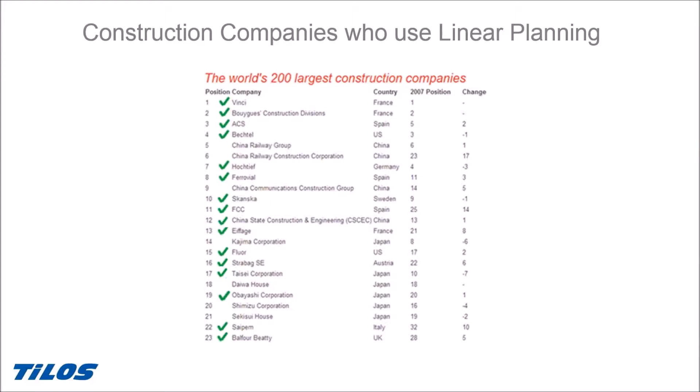Our customer list has more than 2000 entries, and I'm very proud to inform you that Tilos has been implemented in the top 25 construction companies - more than 22 of the top 25 are users of Tilos.

Looking at specific countries and Tilos users, Tilos is really accepted as an industry standard, and today it's implemented for many big and important strategic projects worldwide, including in Asia, America, and Europe. These are some of the selected customers who have successfully implemented and are using Tilos in their projects.

We are very proud because today, the biggest ongoing railway projects, highway projects, bridge projects, and pipeline projects - Tilos is the selected strategic planning system for these projects known by all of us, ongoing in the infrastructure industry.

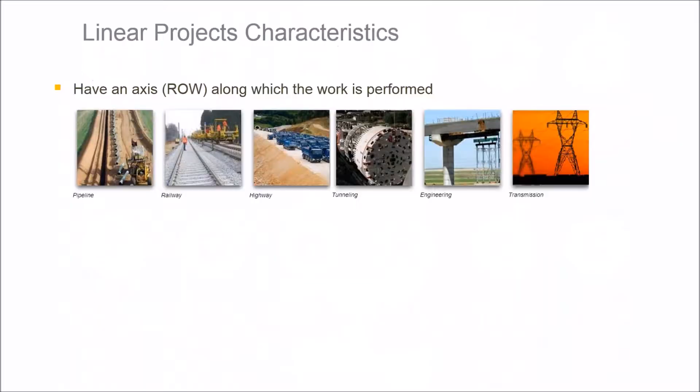Before my live demo, which I will give, I just want to cover some basics first.

The name Tilos comes from: TI means time, LO means location, S means system. So the name of the product is Time Location System. It's called by different terms in different countries, like line of balance, time chainage diagram, time distance diagram, French diagram, march diagram - different terms, but all the idea is the same.

The major need is that when you plan for infrastructure projects like linear projects - pipelines, railways, highways, tunneling, engineering, and transmission projects - these are very long projects. Time planning is very important, but location planning is equally important. That's why Tilos provides an extra dimension for managing repetitive work, giving a graphical representation and graphical way of project management planning and reporting at the same time for linear projects.

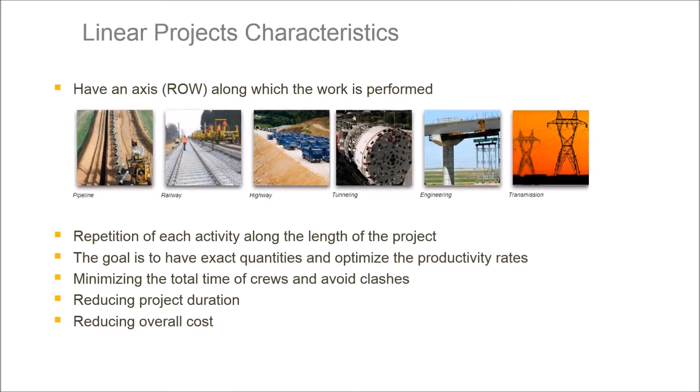The usage of Tilos and linear planning is very wide because it requires less detail in the project. You can start at a very early stage for planning - we can make feasibility studies, integrate cost data, integrate quantity data, and create feasibility planning.

Tilos can also be used very widely in the tender period for tender planning. You can create multiple scenarios, what-if analysis, what-if analyzed schedules using the Tilos approach, and build your tender strategy based on the tender planning with Tilos.

Of course, when your company wins the contract, it's also used in operations like controlling and executing the time of the project. And at the end of the project, you can use it for special studies like change orders, variation orders, claim analysis, and so on.

The system can be used by project owners, engineering companies, contractors, subcontractors, and suppliers. And this is very important.

Before we go to the software, we need to understand the concept of linear planning. That's why I prepared this example, representing 2000 meters and 500,000 cubic meters of excavation work. You can see we are going to make an excavation in the area highlighted by blue, and I'd like to present how we can plan this using linear planning for that kind of linear project.

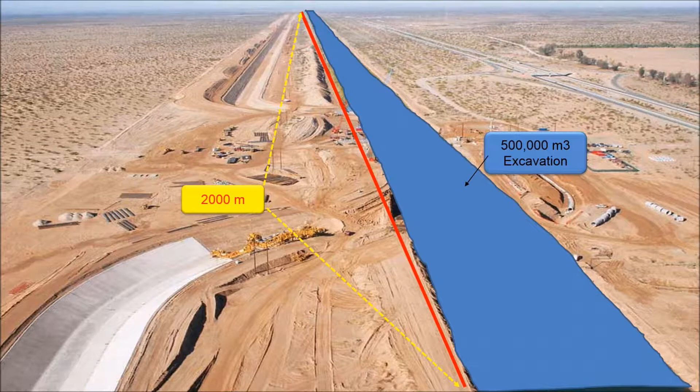So what we do is bring in the locations - 100 meters, 200 meters, starting from 0, up to 2000 meters. So that's the first kilometer and second kilometer. This represents the excavation area which I am going to work on.

This is the location dimension. I'm also planning the time here - March, April, and May. This represents time, and this represents location. 12 means the 12th week, 13th week, and 14th week. So you can also make it on a daily, weekly, or hourly basis.

In this example, I would like to present the weekly planning. First, it's very important to register the activity. People, especially those having a Gantt chart based planning system, get difficulties understanding the concept from the beginning. But once you understand it, this solution will really help.

As you see, the black line represents the activity called excavation. This is the excavation activity, and for each area when I touch it, I can get different information.

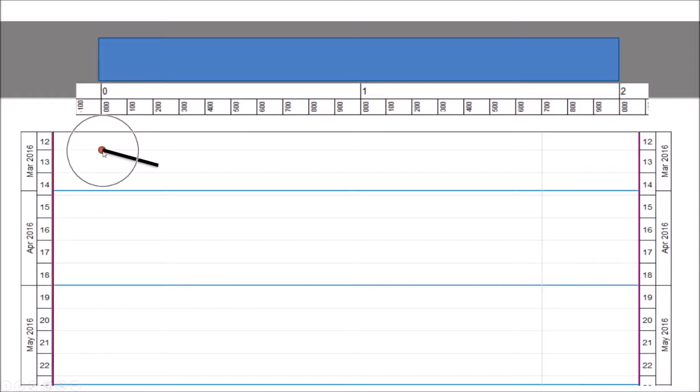For example, the beginning of the activity represents where you go to up locations, so this is the location plan - the starting location of the excavation work. If you go to the left side, it represents the start date. So when you touch the activity beginning, you can see start location and start date.

Plus, because of going in this direction, you can also understand that construction starts from 0 but goes in this direction, to the right. So this also shows the direction of the work. So I have at least three pieces of information: start location, start date, and direction of the work.

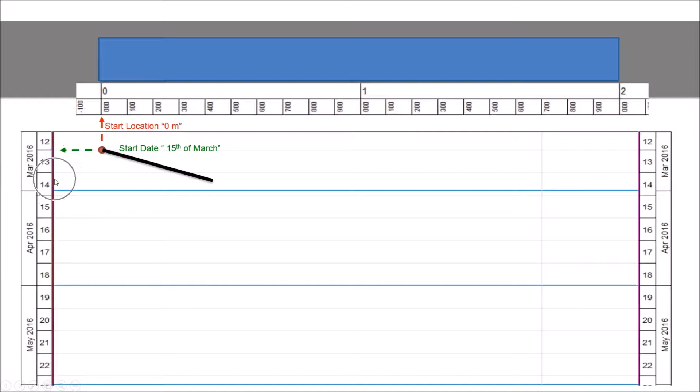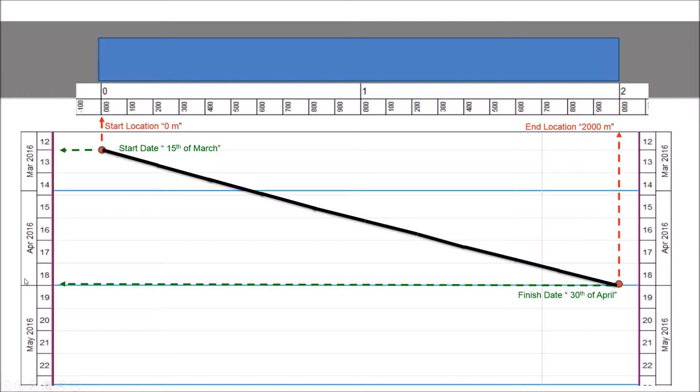We can continue, and when you come to here, you can see that at 400 meters we reach the end of March, and at 600 meters we reach the beginning of April. So when you add up the activities, you can see that we complete all excavation activities in the end of April.

So you can see this is the end date of all excavation works, and end date minus start date gives us durations - this is the duration of activities. In a regular bar chart we just see the duration of activities, but here you can see we have more information, and we will go into more detail.

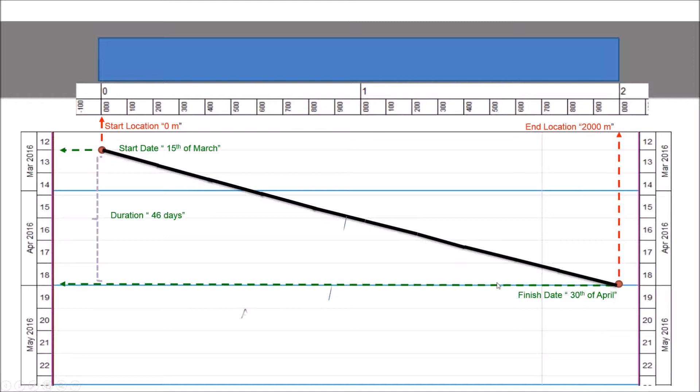When you look at the angle here, you will also understand productivity of the work and difficulties of the area - in a moment it will be clearer. You can understand the speed of the work through triangle calculations. And of course we have average productivity, and also average productivity per date for the quantities, so this is also giving information.

Okay, let's make it a bit more complicated. Let's say our 2000 meters have 7 different zones, and for each zone we've made a soil analysis, understanding that because the soil types differ, we can have different productivity. So estimated productivity for zone 1 is 21 meters per day, zone 2 is 20 meters per day, zone 3 is 10 meters per day, zone 4 is 14 meters per day - each zone has different achievement for excavation.

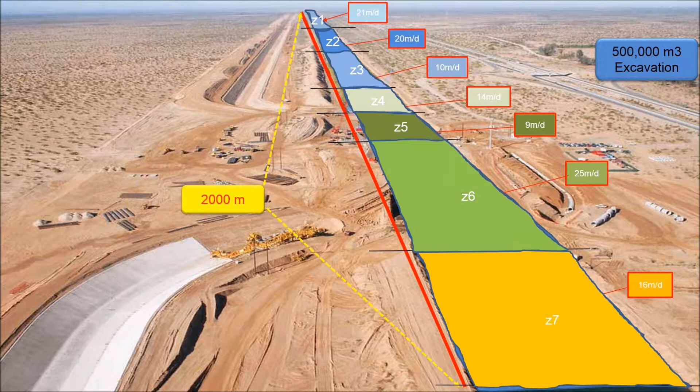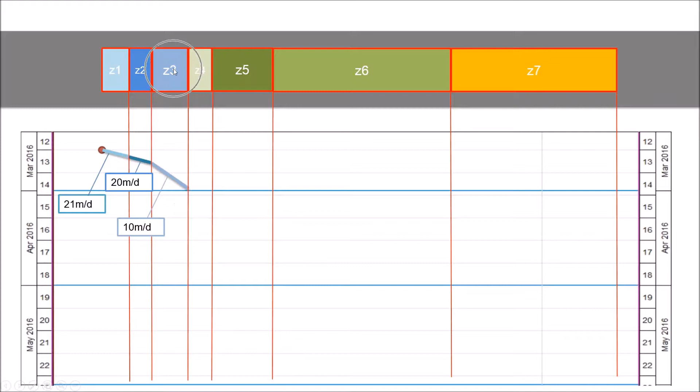Let's go to this example - actually the same example, but making a more advanced estimation. We start the activity as before, showing 21 meters per day for zone 1, 20 meters per day for zone 2. In zone 3 you can see the speed change - 10 meters per day, and 14 meters per day for zone 4.

This represents the speed of the work, and the driving factor for the speed is always the zones, since each zone has different kinds of soil types. Of course, generally when we do excavation, we don't measure productivity per meter, but rather productivity in cubic meters per hour, because that's our measurement.

But I'd like to show you that we're making a line for excavation measured in meters - this is generally how we measure tunnels, pipeline excavation, etc. I just want to give you the concept. That's why for excavation, productivity is generally based on cubic meters per hour, or cubic meters per day, but at least you get the point that we can have different speeds based on different soil types.

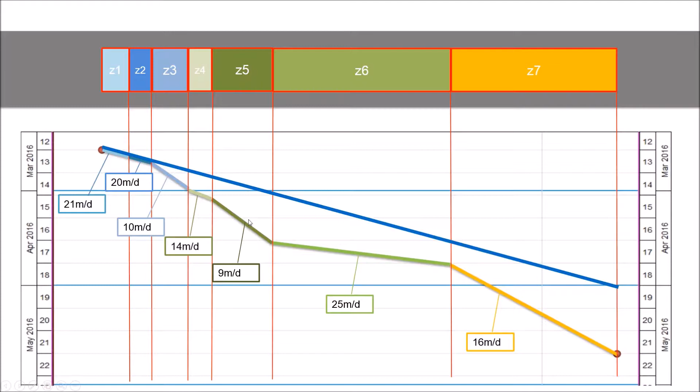Of course, you can see this was the target line for 21 meters per day, and if we are below the target line, this is the delay we're going to have. So the first blue line shows no impact from soil types, average productivity 21 days. But later on, after making the soil analysis, we realize each zone can have a different speed.

This always shows us how we can compare the first initial idea with detailed planning. This is a common scenario where people make this mistake: during the tender, we present an estimated blue line, but when we win the contract, we go to more deep analysis.

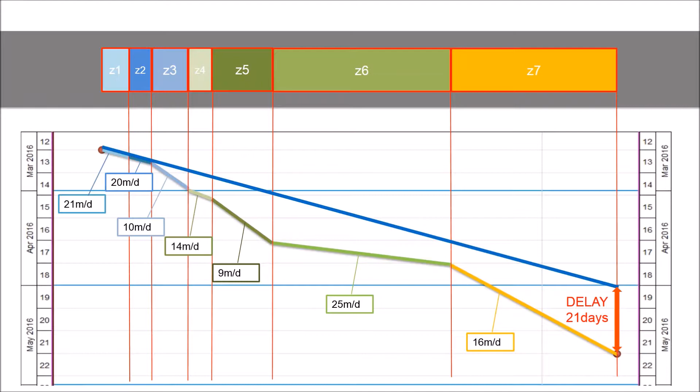Based on the deep analysis, we find that because of different zones and different productivity, we may have a delay. Of course, there is a method for this, for example integrated resource planning, which helps avoid the delay. There is no miracle in construction where you can use any software and immediately your productivity increases. Technology helps, but there is a limit.

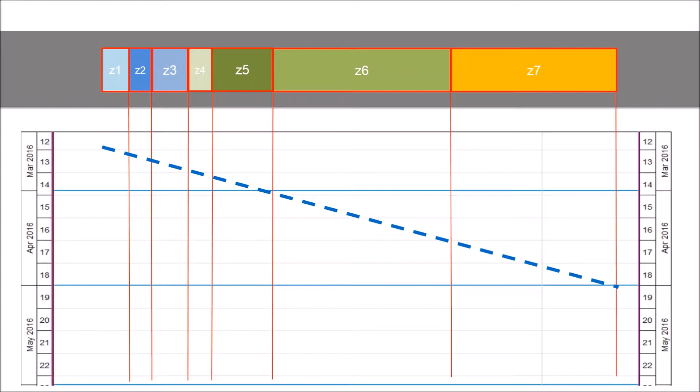That's why with Tilos you can always make a what-if analysis. Since we don't want delay, Tilos will tell us what we need to do to avoid it. First of all, we can work more hours, or increase the resources. In this example, I would like to show increasing the resources. This is my target line - I need to finish in 46 days.

My first plan starts with crew 1. In zone 1 we started and did our plan as we originally considered, and it seems the blue line and the light blue line are similar - everything is going as planned. Zone 2 is going well too, so that's alright.

But we can see that when the crew comes to zone 3, because of the difficulties there, our speed goes down. It means we are getting far from the target line, so we are going to delay.

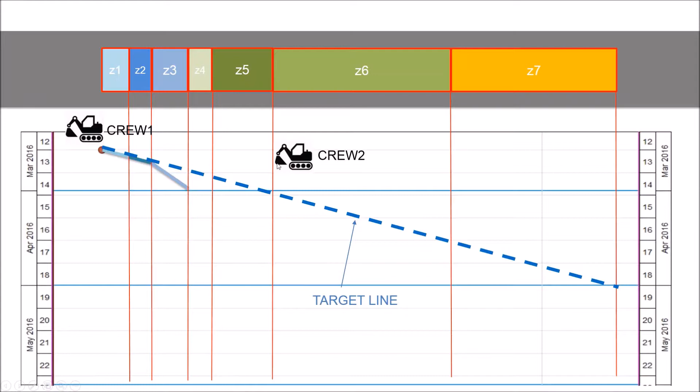So what we need to do is either increase production here, or if that's not possible, we need to increase the crew. So we decided to have an extra crew and start working in zone 6 with a second crew. At the same time crew 1 continues, so we have two resource teams and we finish our project on time.

Of course, extra resources mean extra cost, but sometimes we have no possibility of finishing on time without extra investment. That's why it's very important, at a very early stage of the project when preparing our price offer, to know about this. That's why planning is very important at a very early stage.

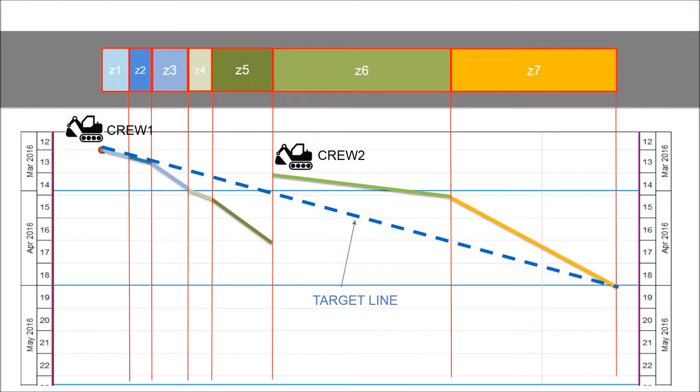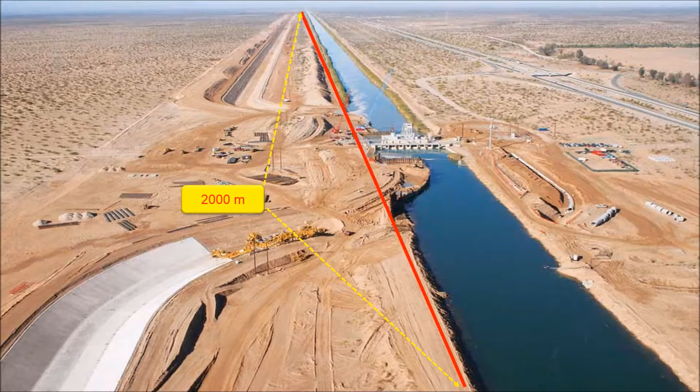Details are very important and impact the plan. This is the idea of making a plan for one discipline, for excavation. Of course, in construction we have multiple disciplines, and I just showed one activity, but later on you can also add concrete and other activities, and have it all in one plan.

The major goal of what we do with Tilos is giving you an extra dimension: time planning, location planning, and also integrated cost planning. And if you open our toolbox, you can get more, because Tilos provides outside factors like resource integration and unit integration for quantity tracking and quantity planning.

We also have the possibility to update the progress - percent complete of the duration, percent complete of the work, units, cost and budgets. What are the other factors which you can also integrate?

Soil type is one kind of outside factor, but what are other driving factors? Weather conditions - if you're working in winter or summer, special conditions like Easter, Ramadan, and cultural differences by location. We also have other factors like road crossings, railway crossings, and special zones where sometimes we cannot work at 100% productivity because of different kinds of difficulties - environment protection, radiation, archaeological excavation - so we have unlimited issues during construction. That's why these all impact our construction performance.

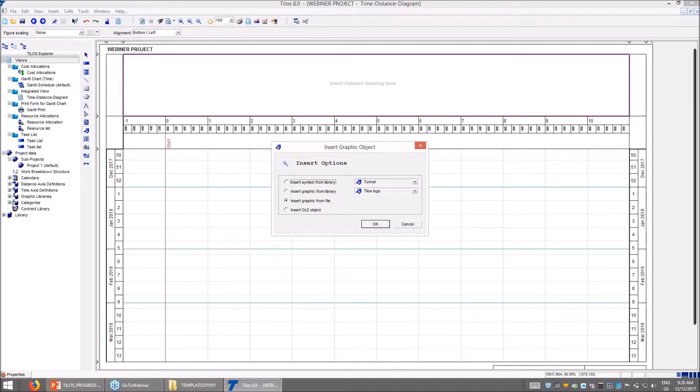This is optional. You can get it from the library. You can say we would like to make tunnels here, and you can see that the system is putting the tunnel drawing. Or you can bring it from PDF or JPEG files from your graphic files.

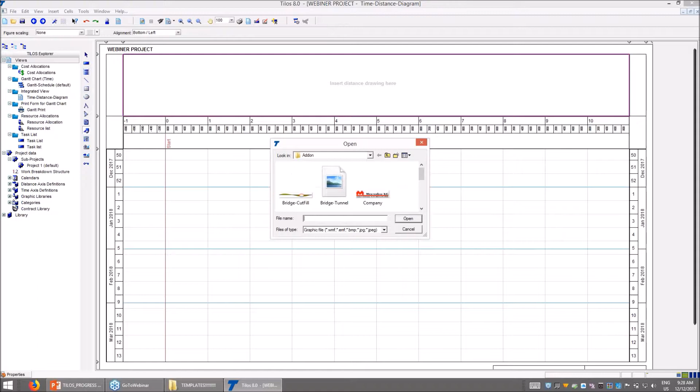From the file, you can just select it. You can say we would like to make bridge and cut-fill here, so you can see that it also represents the project we are going to work on.

You can see that we have an area here which we need to make excavation, and this is the area which we need to make backfilling work.

It's easy to go on adding activities. When you select activities here, you can say that we are going to make topsoil stripping here, and this is the activity which we added.

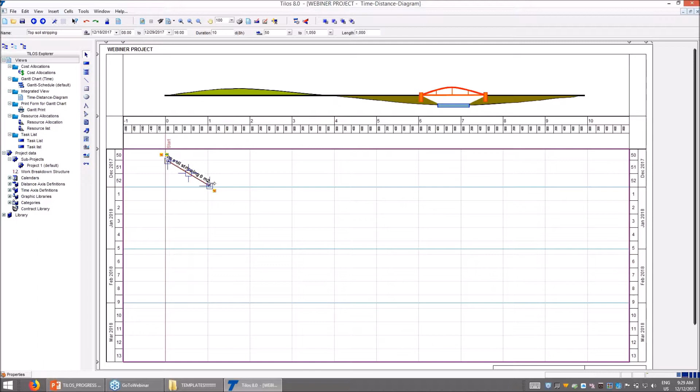Of course, you can just make it one activity as a part, or you can also extend this activity. You can say we are going to make all the topsoil stripping activities here.

When you have one activity selected, you can go to activity detail. This is the activity name, which you can type.

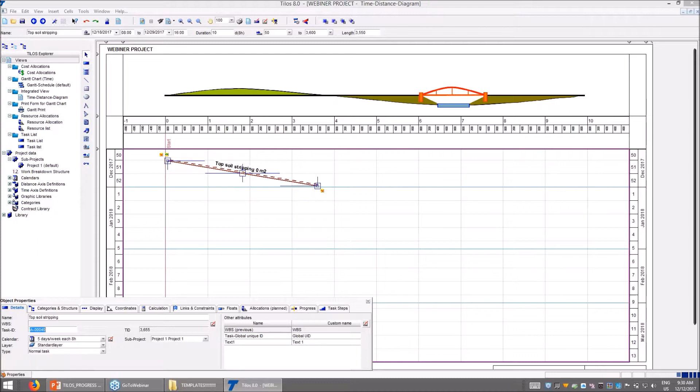We have activity ID, meaning each activity has a unique ID. We also have activity calendars, which you can see and select.

You can create activity types and so on. I think I have some technical problem because I'm still using Tilos 8, and Tilos 10 is available soon, so maybe it's time for me to upgrade.

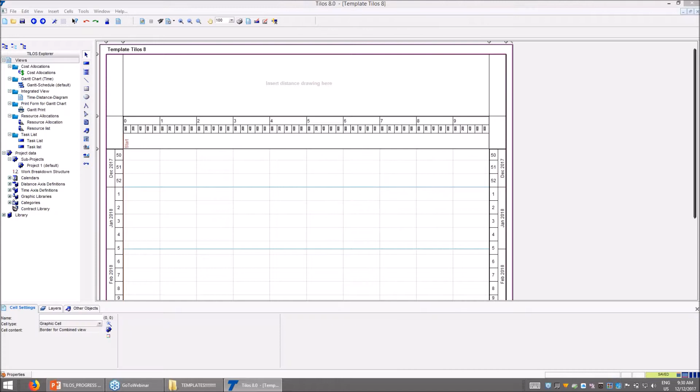Okay, let's create it again here, very fast, let's put it here. Again, the drawing.

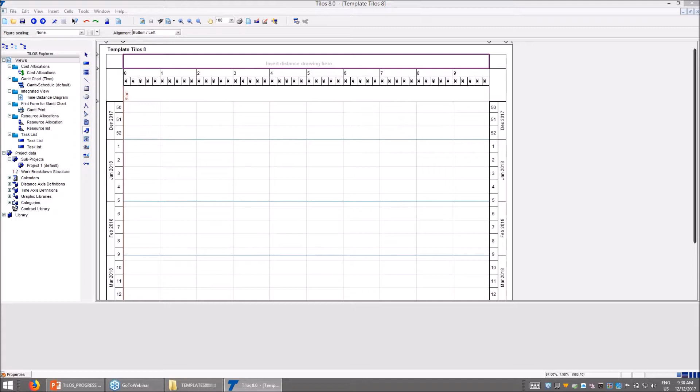By the way, you don't have to put a drawing. This is also possible optionally without a drawing. So I would like to add another activity this time.

Okay, you can see this is the same activity which I created. Here you can have a calendar, and you can have the activity type, which is normal task, summary task, start milestone, and end milestone.

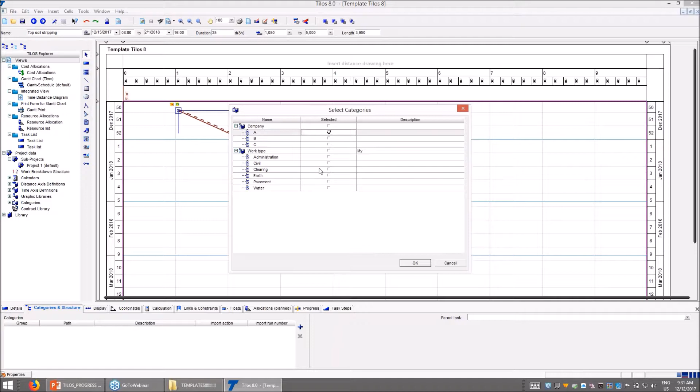For each activity you can add, for example, activity codes. This is activity type A, and this is, for example, earthworks. This activity coding will help you for grouping and filtering.

Of course, there is also a layer system in Tilos. For each activity you can apply layers as well. Layers will help you hide some activities.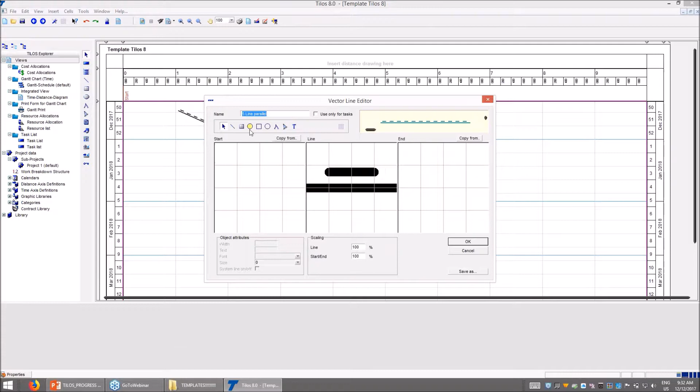For the displaying options, we provide standard coloring, but if you would like your own styles, you can also change the type of the activity. You can draw it, for example, as different lines, and it will be presented how you want. So this is flexible, and you can easily change it.

For the coordination of the work, you can see start date, end date, start location, end location, and the duration, so you can change the direction of the work anytime.

We also have calculation capabilities, which is very powerful and good in Tilos, and planners like it because we can have estimation from given factors. For example, if I would like to estimate the duration of the work, I'm entering quantity, let's say 40,000 square meters of topsoil stripping, and per hour achievement of 120 square meters. The system calculated this is 42 days.

If we write here 20,000 as a quantity, it will give me that 20,000 square meters will be achieved in 21 days. You can also change the factor for per hour achievement. If you work it at 200 square meters per hour, it will be 13 days.

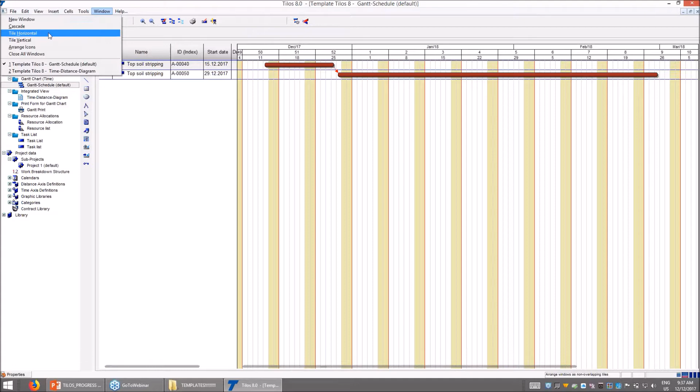One advantage of Tilos is it also provides a classic Gantt chart based view - this is activity A and activity B. When I open both at the same time, please see that when you change something here in Tilos format, this is Microsoft Project, Asta Power Project, and Tilos format, so you can see immediate changes. So what I am doing with Tilos, for people new to Tilos, is nothing different than what you do daily with other planning systems, but we have an extra dimension.

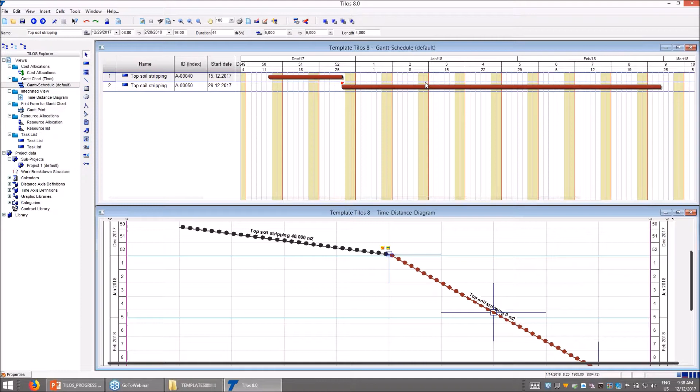But one advantage in Tilos is when you have, for example, these two views, you can select the second activity here, go to coordinates, and change the direction of the work. When I change the direction of the work, please see that nothing changes in the Gantt chart, but in the Tilos format, we can see that activity 1 finishing, the team immediately continues for activity 2 in this direction, because changing direction gives us the possibility of seeing from which direction we are going to work till what direction.

So that's the advantage of Tilos, which we can also get that information. Plus, we have more advanced lag type calculation, which is not only finish to start 5 days, but you can say that when activity finishes at kilometer third, second activity should start from 9, so that we can make distance-based predecessor, distance-based successor, and also percent complete or equipment mobilization.

So that's the difference here: when we finish, we would like to drive our equipment from here, which I selected here, and I am opening equipment mobilization, and the system is asking me per hour driving, so let's say 100 meters per hour we drive.

The system automatically calculates the lag here, saying that, okay, driving here when I schedule it, and because of this 100 meters per hour, it will take 5 days driving from 5 kilometers till 9 kilometers.

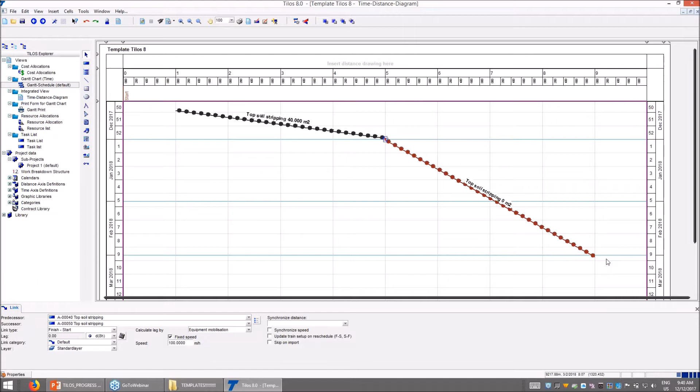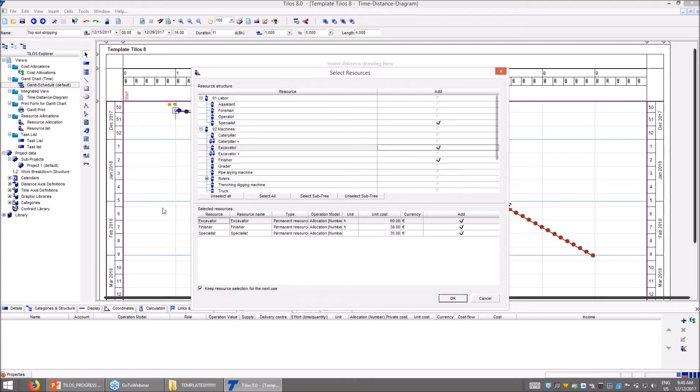Plus, when you have an activity, you can also assign resources, which is resource integration. We can add labor, materials, equipment by selecting with the unit price, and when you assign it, the system will also estimate the cost.

So when you go to activity calculation, you can see now we have a project cost and a project income. In these resources, income unit was not entered, that's why it's not shown, but you can get the cost.

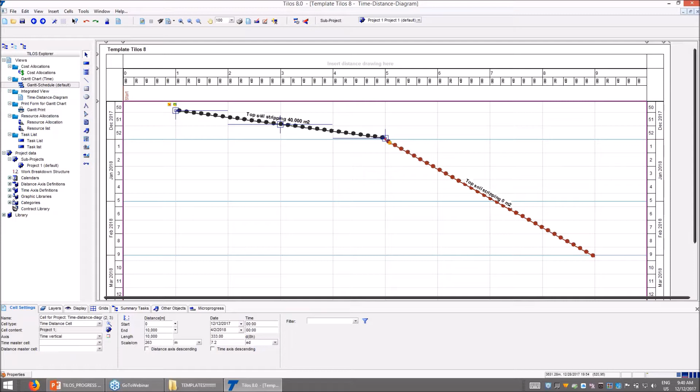And resource integrations. On the left side, we have all the information, the list of the tasks, so when you open the task list, you can see, like in Excel, the task details, because if you don't want to see only the line, you can also see all the detail of the task here by selecting task list.

We have calendars. There is also more information like activity types, resources, that kind of things. All this is available inside the system.

And Tilos is integrated with Primavera, and you can import or export in Primavera, Microsoft Project, or Asta Power Project format, so you can just select it. You can see that it's integrated with Microsoft Project, Primavera, and Asta Power Project.

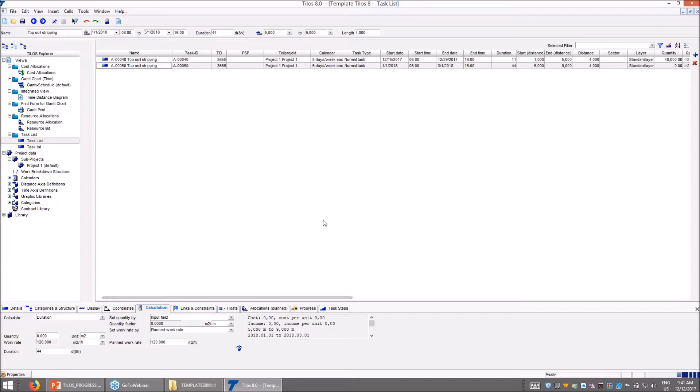Okay, and this is the basics which I would like to share with you. I hope it's not boring if you're already familiar with Tilos, but I would like to show you some advanced samples.

For example, how we can create repetitive work using activity templates. This is an example for the bridge. Let's make it a little bit bigger here. Okay, this is the example which I would like to show today.

Let me first explain the templates. This is the time: July, August, September, October, November, December, and January. On the top, we also have distance, which is pier number 1, pier number 2, and this is pier number 17. And here, start location: 0 meters, 45 meters, and 95 meters.

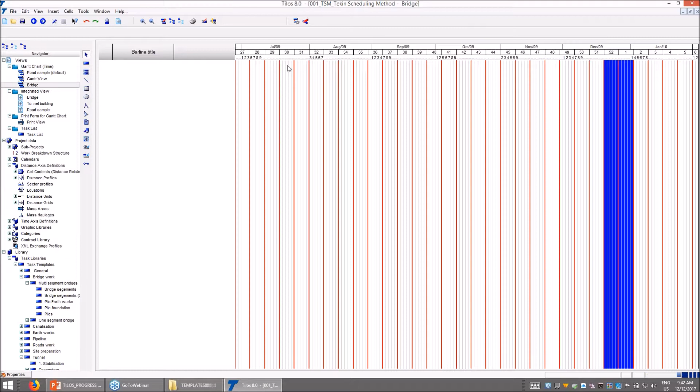I want to also show the Gantt chart. As you see, there is no information available on the Gantt chart, so I can create a schedule from the Gantt chart first, or I can create it here from Tilos.

The blue line represents the Christmas period, starting from the 20th till the 3rd of January, it's a Christmas time in Europe.

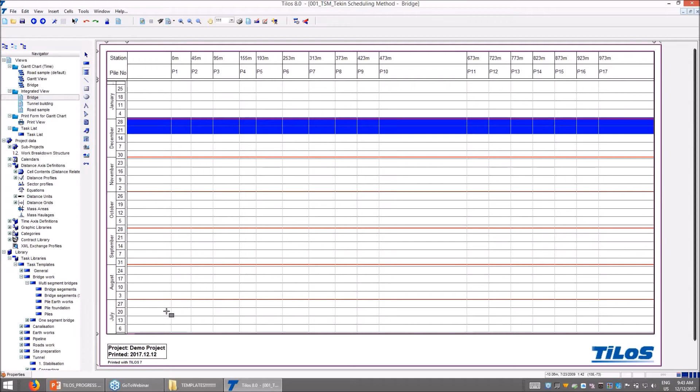Okay, now I'm not adding activities one by one. I would like to put it for task groups. I just select it here and go to select the location, and I have a group of activities available called the piles, and here I would like to create activities based on the distance.

It's asking me the profile. I'm saying okay, I would like to make it pile works, and here link method, because I'm making a method of statement, and my strategy is I would like to link the first task group to the second task group.

Okay, what does it mean? Foundation pier 1 finishes, foundation pier 2 starts, so I make it only a relation from foundation to foundation.

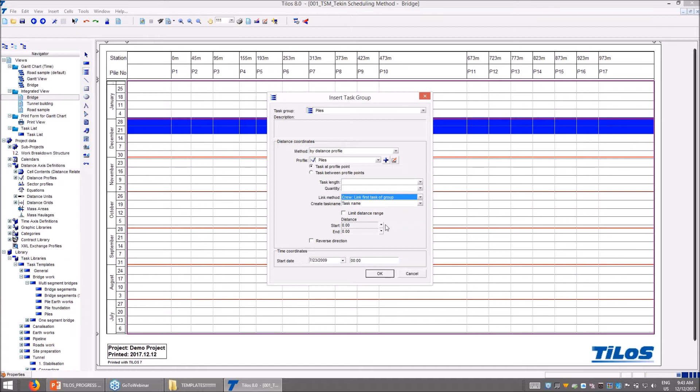Task activities, I would like to create automatically, and when I select it, immediately all my schedules are created. With F9, you can see foundation, abutment, and decking, foundation, abutment, and decking, so all my schedule has been created automatically.

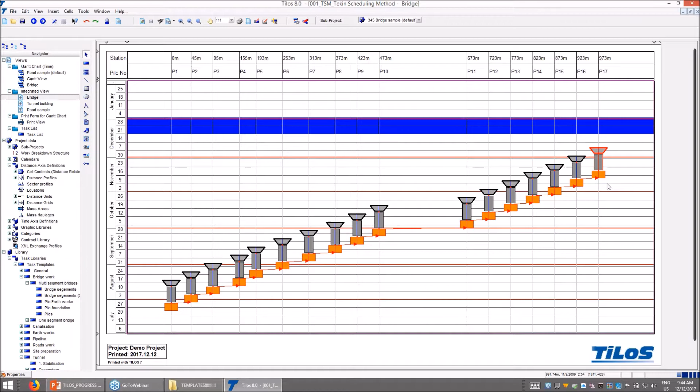Let me just show how it will look like in the Gantt chart.

You can see that it was empty, but now we have more than 50 activities created for foundation and abutments, piles, and here you can see that activities are created.

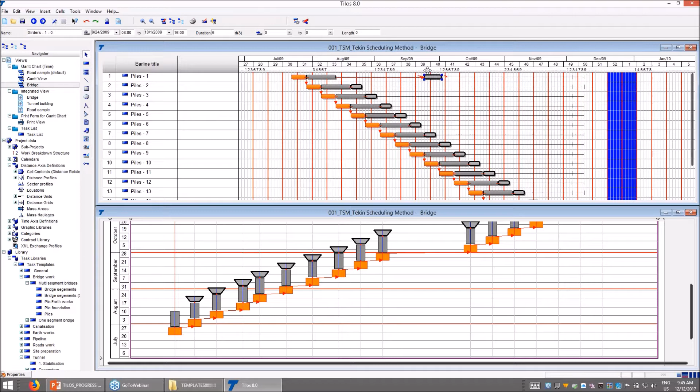Let's open both of them at the same time like I did before. What I want to show is that when you change the activity, you can immediately get impact on this, or you can select it and say, okay, I would like to start doing this here. You can see that this is immediately giving changes.

What I want to do now is also do the bridge segments, so I selected for the segment works and I'm just adding activities for the bridge segment.

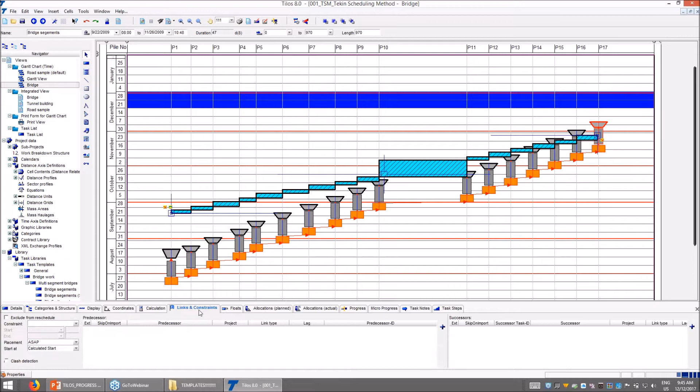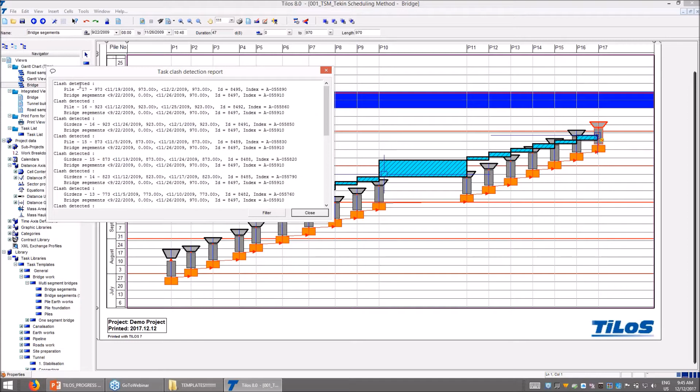First of all, this approach is appreciated by people because graphically you can immediately recognize there is a logic error, which we call clash detection. If you go to the clash detections area, if it's not visible you can also select clash detections options, and when you run the clash reports, the system gives you which areas we have clashes, so that's pile number 10, pile number 11, and pile number 13, 14, 15, 16, and 17.

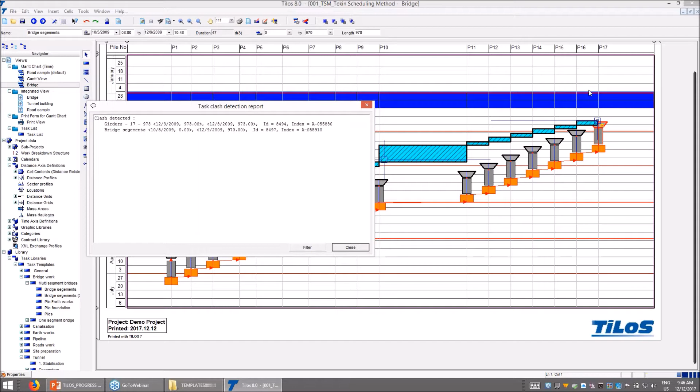If you just move this activity here, let's just keep it to only one activity and run clashes again, you can see that clash detection immediately gives that pier number 17 we have a clash, and this is not good.

But of course you can avoid it by creating the link. What does it mean? You can just select this activity and say that when this activity finishes, this activity also finishes, so you go to relations and say we would like to have finish-to-finish with 5 days lag, and when you schedule it, you can see this is the activity which we created.

Of course there's one important thing. When this activity delays on the calendar on the blue line, you can see that because of non-working time, activity duration is increased — calendar duration, I mean. So you can also see that kind of advantage.

But now let's say, okay, this is very risky. If we have it just before Christmas time, we would like to increase our crews, so I want to make it a second team.

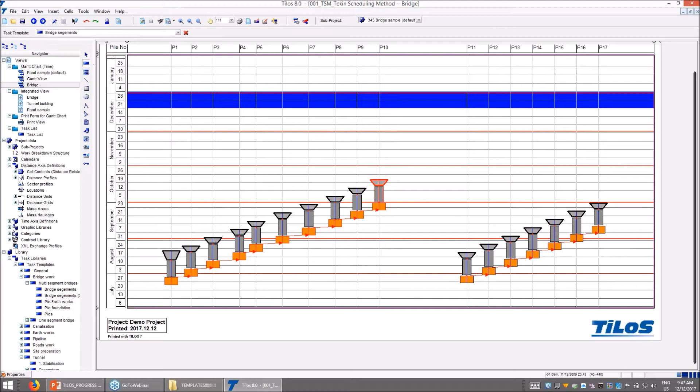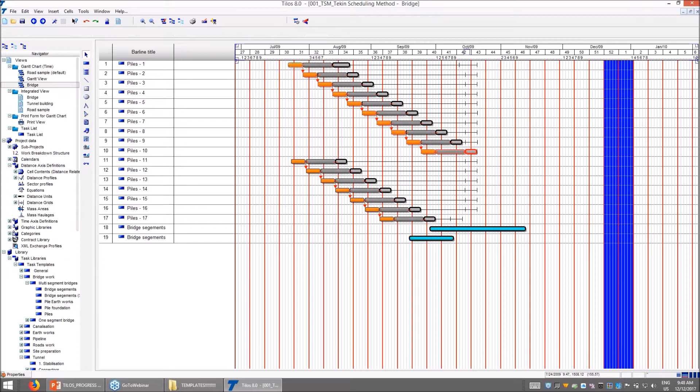Okay, scheduling — move this link and add again here for this work, and create here the second bridge segment, so you can see that when I go to the Gantt chart it looks completely different because we just made it. Plus you can make the link start here, schedule it.

And you can come back to Tilos format. You can see that this link has been created. So this is the advantage of Tilos, which lets you work very fast when adding activities by using templates.

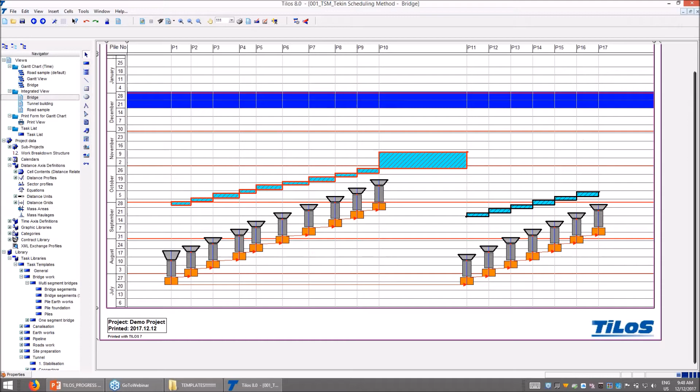Another example I'd like to show, if this is clear and there's no question — I would like to show another factor I was mentioning: weather. Weather has an impact on performance, so I would like to show weather factors.

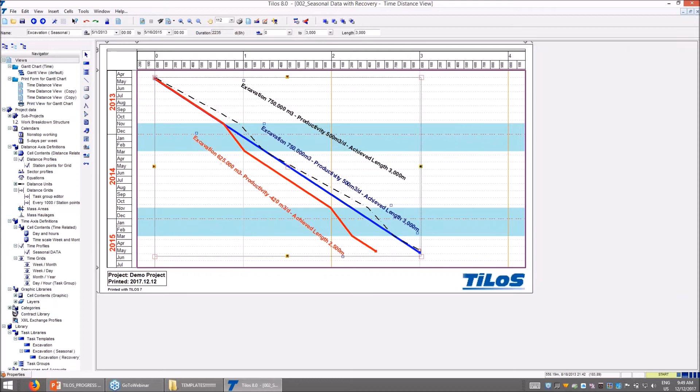Let me explain this example. This is for 3 kilometers of excavation works, and this is the distance, this is the time — 2013, 14, and 15. I'd like to show you that there is a winter calendar, which is November through March, as the winter time.

During the winter, because of the weather and the working hours, we always have productivity issues, unless the project is in a very specific area for a specific reason. Let me show you what that means.

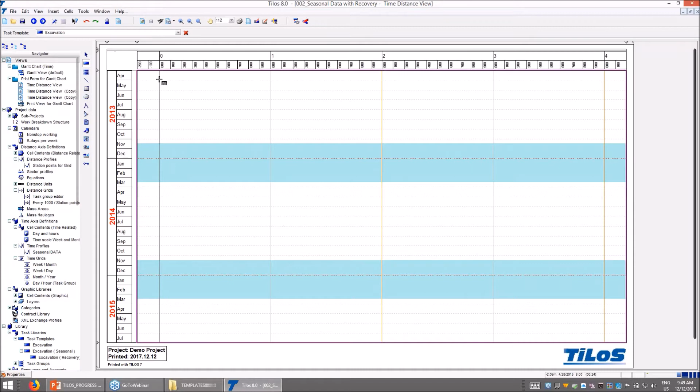First, I would like to create one activity without any impact from the weather, so I'm just drawing activities here to show that we're starting in May and ending in May, but this is 2 years of work, and the distance is 3 kilometers — 750,000 cubic meters, 500 cubic meters per day, achieved length is 3,000 meters. This is what we are going to do, and here there's no impact from weather.

Okay, my question to the software: what if my productivity drops 50% during the winter? So we can also enter excavation by seasons, and you can see when the weather is in the winter period, you can have productivity drop down.

At the same time, with the same resources, we achieve 625,000 cubic meters with 420 cubic meters per day productivity. The achieved length is 2,500 meters.

Is this really expected from the management? No, nobody would like to have this delay. But what I want to mention is, if you know very early on that because of the winter your performance is going to go down, you can create scenarios and prepare yourself. But if you find out in the middle of the project, after winter finishes, it will be too late. As you know, winter is coming.

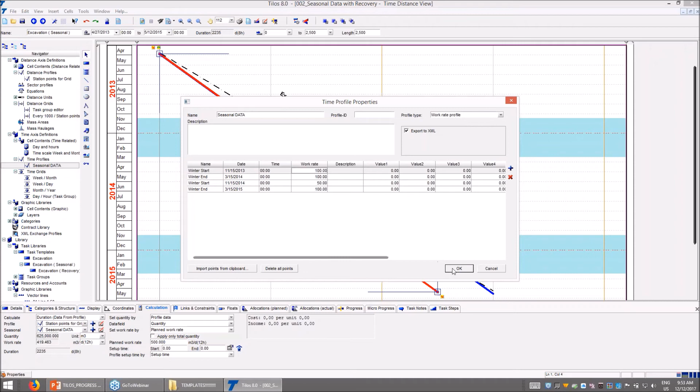You can see that I created a factor here. If I make this one 100 as well, next time when I draw it, select the activity for the seasonal data, you can see that because I wrote 100, it's not impacted by the first winter or second winter - I just made the seasonal data calculation 100 here.

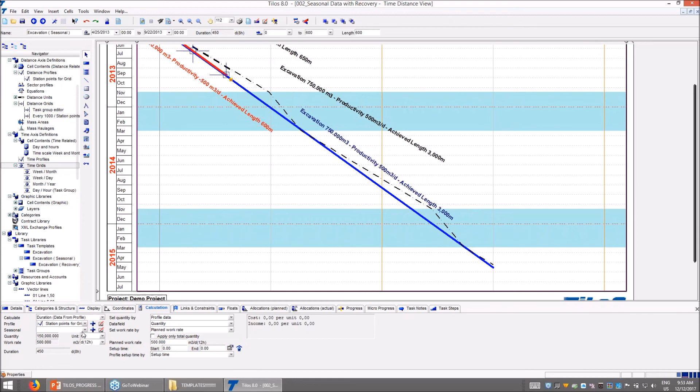So this template, if you want, after the webinar I'm happy to share with you and you can study it. From here you can create seasonal data calculations. Of course, you can make it more advanced - let me give you an example. This is 3 kilometers, but for example we have customers doing 300 kilometers. In a very long project like that, the seasonal data is completely different for the first 50 and the last 50 - some areas are snowing, some areas people are having time at the seaside. So you can also apply seasonal data in different locations.

All right, this is the example of the seasonal data. I've had a warning from my colleagues that time is now up, so I don't have too much time. I can take 1-2 questions.

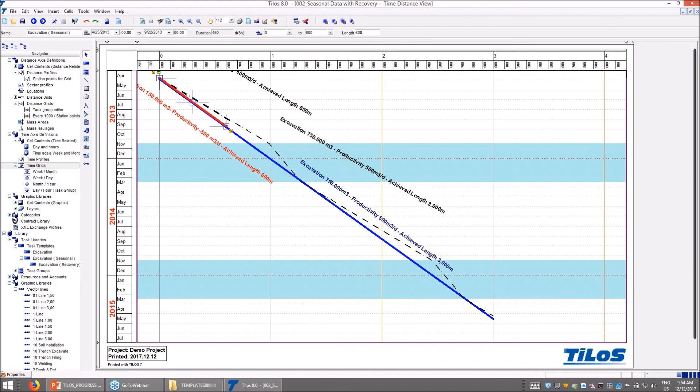Is there any question for today's session? Okay, I see there's not too much question. I hope it was clear - that's why no questions. But thank you very much for your time today.